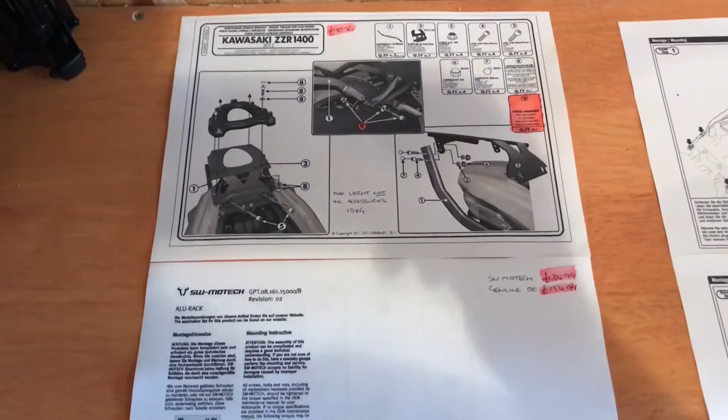There's a few things I'd like to highlight with the original Kawasaki, SW Motech and the Givi rack. The reason I went for Givi is the weight. The others may look good, although they're quite hard on a scale of 1 to 10 for fitting - it would be an 8. This one is probably around a 4 or 5 once you get things in place, and 1 or 2 things that you have to change, which they don't tell you about in the actual fitting.

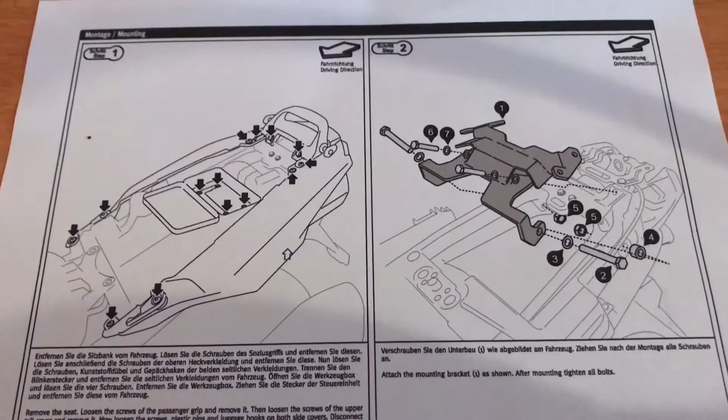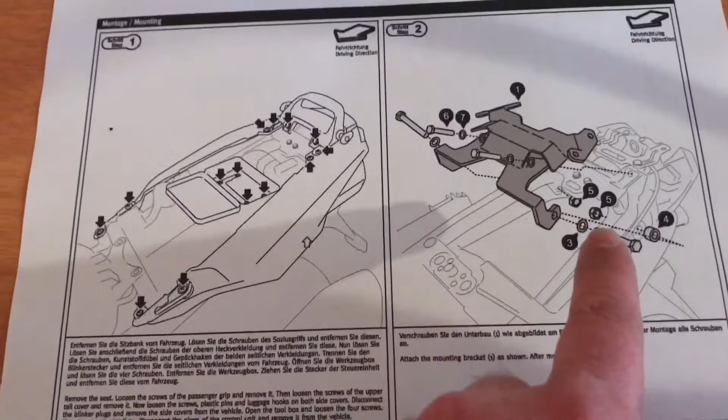If we look at the SW Motech, it's more or less exactly the same as the original Kawasaki, only the Kawasaki is looking around £155, SW Motech around 130 if you can get a good deal. Now, as you can see here, you have to remove the cowling for this frame to go underneath, which is a lot of hassle when you're removing a lot of things from your bike that you don't really want to, for extra money and less weight.

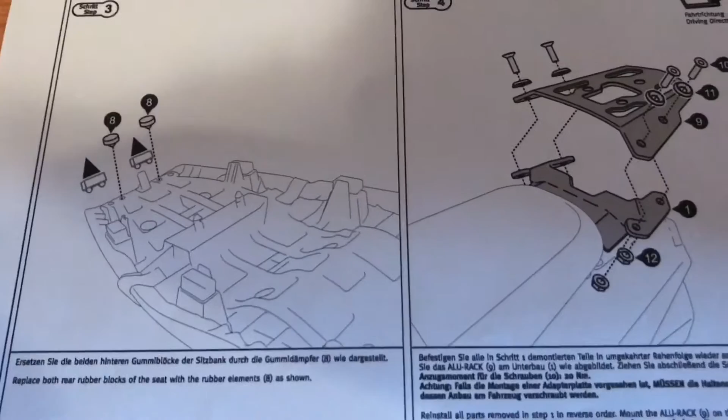Once it's all finished, it does look rather neat, although some modifications are needed to the seat itself on the underside to stop any rubbing or anything else like that. The weight limit on the SW Motech and on Kawasaki top plate is 7.5 kilos. That's not including your top box. So the bigger the top box you have, the less you've got to put in it.

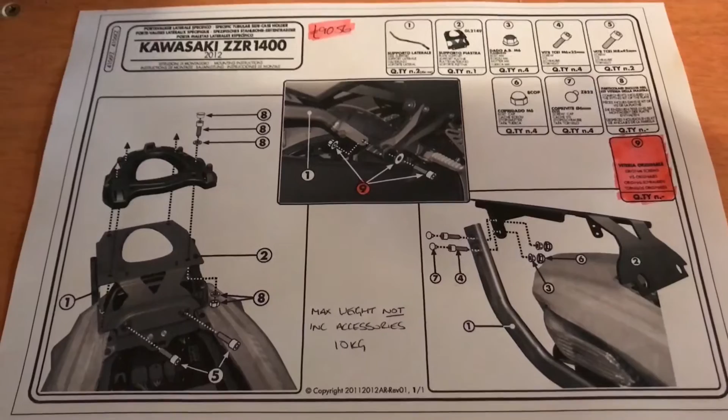With the Givi one, it's a lot easier to fit. As you can see, there's around 6 bolts plus the mounting plate, which is not very difficult at all. I'm quite a novice, and it took me about 15 to 20 minutes to fit.

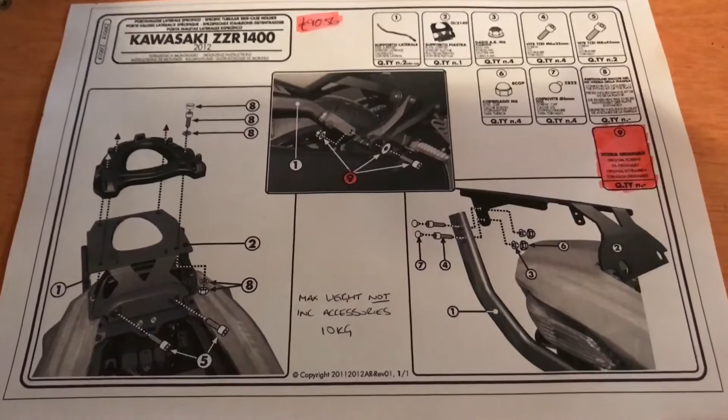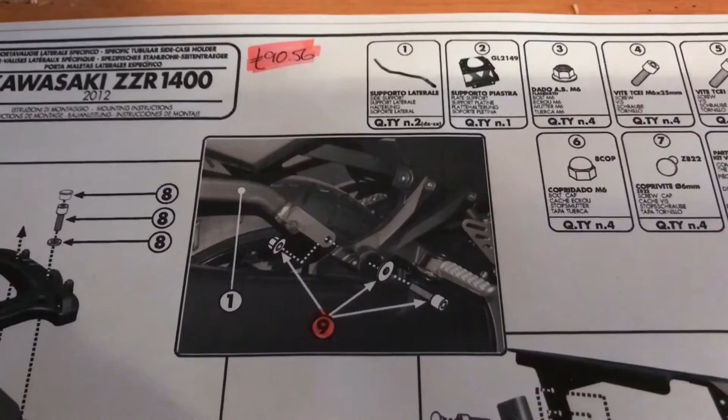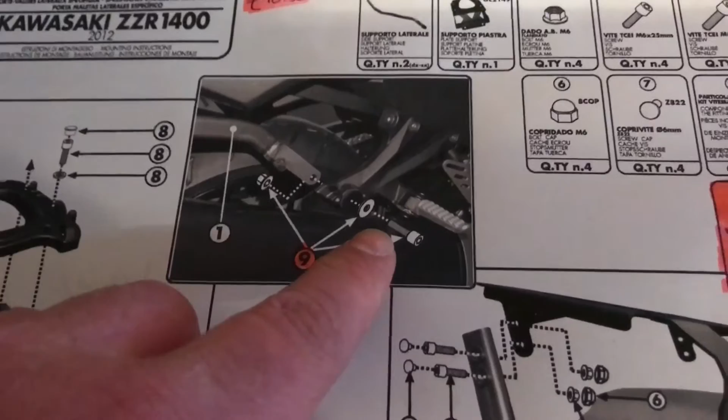One thing I would suggest is the hangers for the exhaust. As you can see highlighted here, number 9, the bolts are way too short, the originals. You probably get two turns of a bolt on the back. It's a nylon lock nut that goes onto the back of it, just here. This bolt, which says quite clearly 'use original', is not right. I bought one identical but 10mm longer, so check your manufacturer's bolt. It really does need to be 10mm longer to be as safe. You're carrying your luggage on the back, you don't want it going missing.

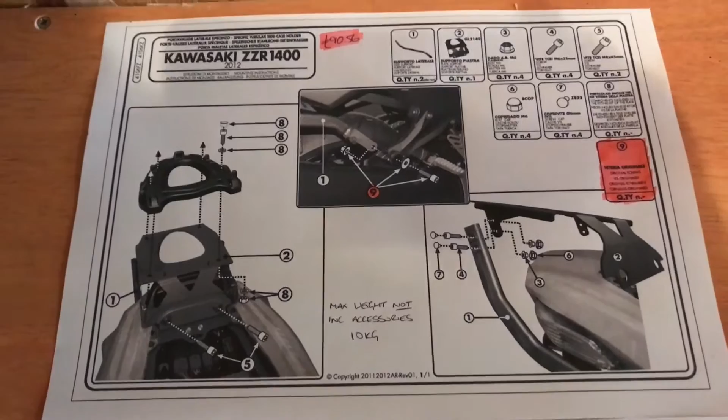So those are the instructions for this, and I'll show you a quick tutorial on the bike as to where all the bolts go, and you can make up your mind yourself.

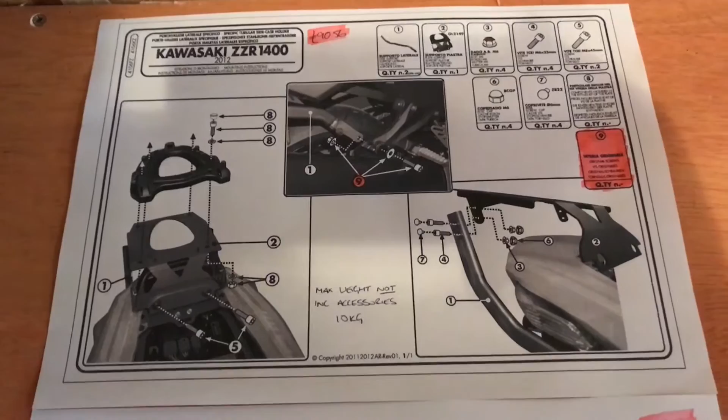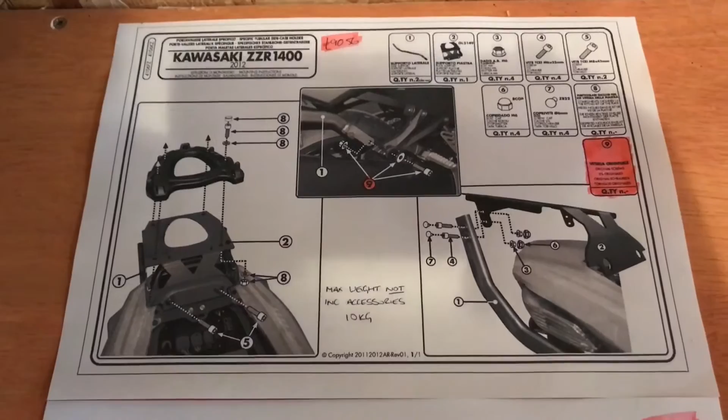The Givi, I might add, holds 10 kilos, not including the top box, mounting plate and all the rest of the kit. So it doesn't look that bad, and it's easier to take off if you don't want it on after touring. I like my seat cowl, my solo seat cowl, back on once I'm done, which I will do.

Going over to the bike, this is the Givi frame with the mounting plate on the top. Now the mounting plate goes on top of the original Givi plate, which has got a nice cutout here. It's quite invisible, so it's a lot easier to clean.

The mounts look fairly neat and curved around the bike. These are the bolts that I was on about. At the back you can see the nut, and you can't see very much coming out the back of it. I had 2 turns and that was over tight in my opinion.

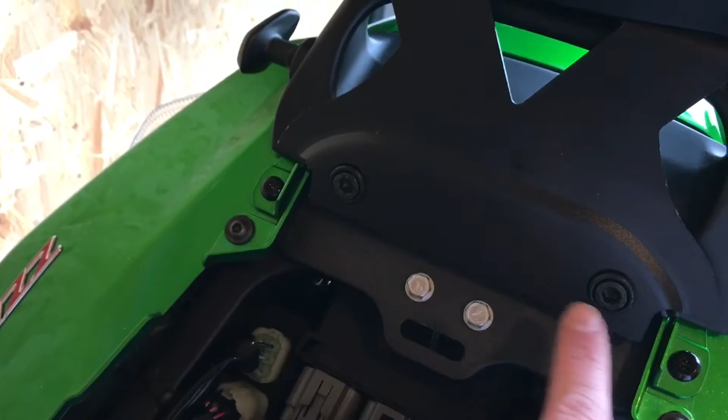I've removed the seat, and as you can see here, you have 2 black bolts that go straight through the pillion handle into the frame where you remove it from. They're the same bolts. At first I made the mistake of taking the pillion handle off to see if that was the right way to do it, because it wasn't. The instructions are on 1 piece of paper - that's how easy it is to do. None of this has to be removed, just the 2 bolts.

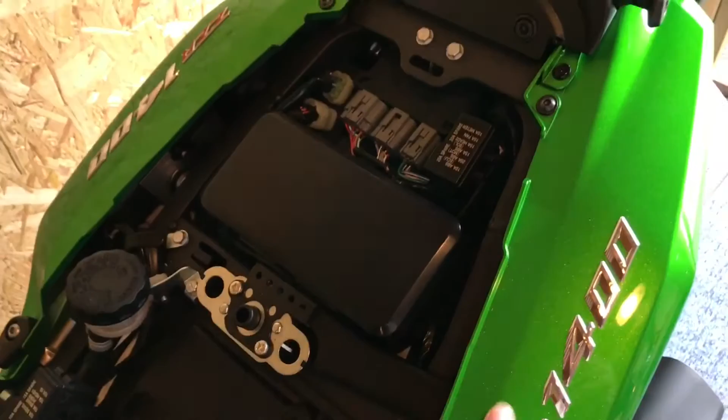So don't remove your pillion handle, it sits on the top. Tighten up as much as you can, and the plate's on. I do recommend, however, fitting the plate first. It was a bit awkward putting these two Allen key headed bolts in the top afterwards, but I managed to do it in the end.

I also made a good judgment and I didn't put these covers in until I'd finished, because I did need to take the plate off and loosen it up a bit to get to these. So it's just one bolt on the hanger, 2 bolts on the plate, and then the plate itself, the top box mono lock or mono key plate, is just 2 Allen keys. So taking it off, if you leave the plate attached, is 4 bolts.

Now with the SW Motech one, you'll have to take off your cowling again, which is a long job. There is nut after nut after nut. It's just not worth it.

This is the top box I chose. It is a Givi V47 mono key system. There's no need for anything bigger, in my opinion, just for a couple of weeks touring in Europe. I have, however, bought the tank lock system just to put all my personal belongings in, and I will be putting a tail pack on also.